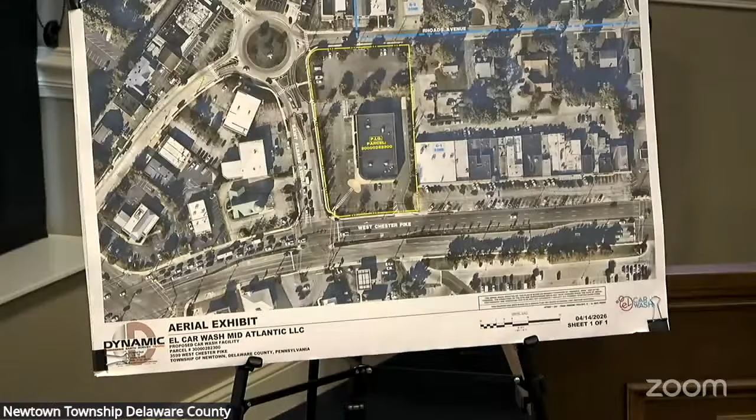Sure. The site is located at 3599 West Chester Pike, State Route 3 and St. Albans Avenue in the Township of Newtown, Delaware County, Pennsylvania. The site is zoned C1 Commercial District. It's approximately 2.21 acres and presently developed as a Rite Aid retail store. The site is bound by primarily C1 Commercial District to the northwest and all the south, west, and east. And a small portion of the site is bounded by the R2 residential district to the northeast.

Okay, and did you go over how the site is currently accessed? Sure. So currently the site is accessed... Is it helpful if I point? Do we have a pointer? Can I move up there, or point to the screen? So currently the site is accessed by West Chester Pike on the south, and that's a right-in. And then it's also accessed by St. Albans on the west. Thank you.

I'd now like to show you what I've marked as exhibits A4 and A5. For the record, A4 is entitled zoning plan. It is dated April 7, 2026, prepared by Dynamic Engineering. And exhibit A5 is entitled zoning landscape plan, also dated April 7, 2026, prepared by Dynamic Engineering. Did you prepare or supervise the preparation of both exhibits A4 and A5?

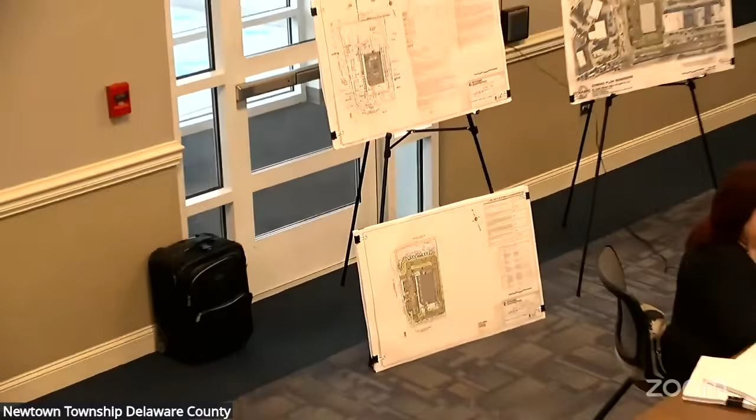Yes. Okay. And which one do we have up on the board here? That's A5, the landscape plan. And to the left would be the zoning plan, exhibit A4, correct? This is the landscape plan. That up there? Oh, sorry, all right. It's okay. And then the zoning permit plan is here. And this is a rendering of the zoning permit plan and landscape plan. Okay, and using a combination of those exhibits or the combined rendering, please describe for the board how the property is proposed to be redeveloped.

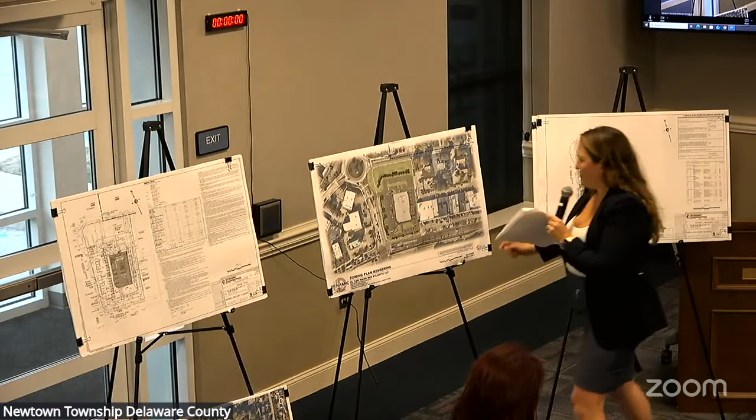Sure. So the project proposes adaptive reuse of the existing building that's there today. The existing building will be retrofitted with a proposed car wash tunnel and interior parking spaces for vacuums. The existing driveway along West Chester Pike is proposed to be closed. And a dedicated entrance is proposed to the north, as well as a dedicated egress to the south. So overall, the site is proposed to have clockwise circulation.

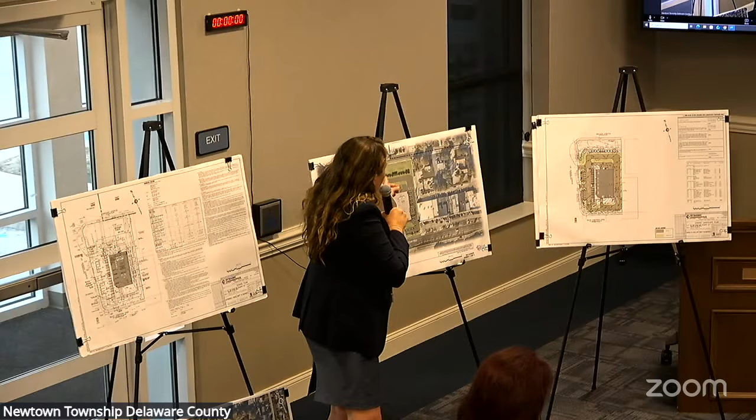So cars enter from the north along St. Albans and then turn into the site to queue, going through the drive-through, stacking, and then through the car wash in the building. Cars then have the option to either make a right turn into the vacuum spaces or make a left and go out to the exterior vacuum spaces, and then ultimately exit the site from the egress point along St. Albans. Okay, is there a bypass lane in case you don't want to go through? There's a continuous bypass through the entire drive-through. Okay, but the circulation pattern for the car wash is one way?

Correct. Okay, and what's happening to the rear of the property compared to the existing conditions? So in existing conditions, the rear of the property is primarily paved with a parking lot. As part of this proposed development, the parking lot will be demolished and new landscaping will be brought in. There's a significant improvement and reduction in impervious surface overall. There's proposed landscaping to the north to create a consistent buffer, as well as landscaping on the west side along St. Albans and along West Chester Pike.

Okay, and approximately what is the distance between the Rhoads Avenue curb line to the buffer or edge of the drive aisle? A little bit less than 80 feet, about 79 feet. And currently, where does the paving go to in the existing conditions? Do you have an estimate? Yep. Currently, the pavement goes to within about 5 feet of the property line. Okay.

Has the applicant developed any conceptual architectural elevations or designs as to how the proposed redeveloped car wash will look? Yes, I have. And if we can, turn to exhibits A6 and potentially A7 in the packets, and if you need some help changing the boards, I'll help you there. I have the elevations. Do you want more? Yeah, hold on.

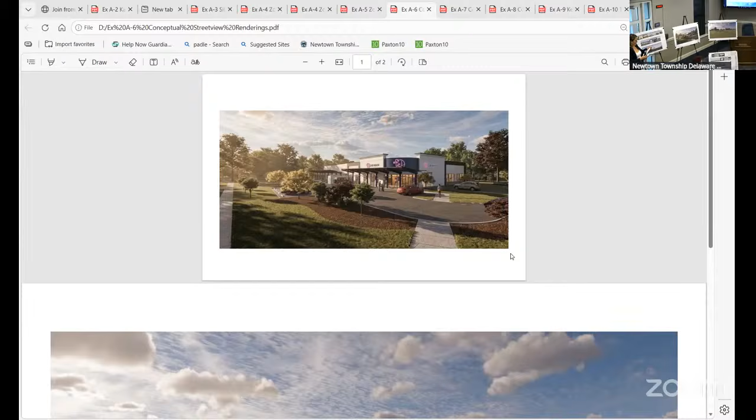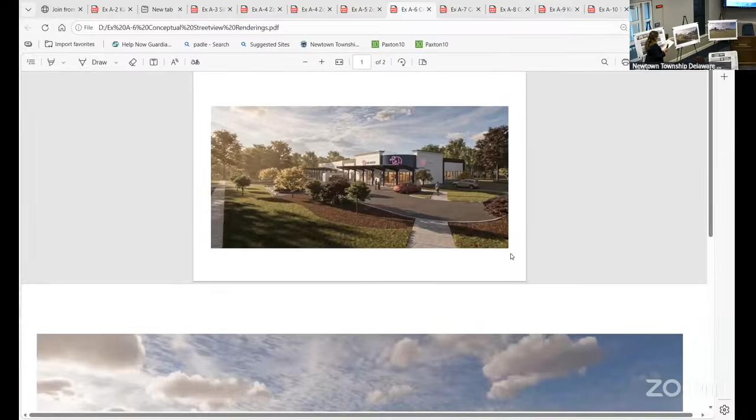Greg, I've been able to pull it up on the screen as well, and I'm sharing the document. So I'll try to stay with you as you walk through. So Kate, looking at what's on the boards going left to right, left is the conceptual renderings, that's exhibit A7. And then the streetscapes are the ones in the center and on the right, that's exhibit A6. The one on the left is A7. If you could please describe for the board where these are taken from, the vantage points, and what they show.

Sure. So I'm gonna start on the right. So this conceptual street view rendering is a view from the intersection of Rhoads Avenue and St. Albans Ave. We're looking towards the northwest corner of the building, and we're seeing sidewalk and green space at the rear of the property, as well as the screen plantings along the drive-through lane. One thing to note is that

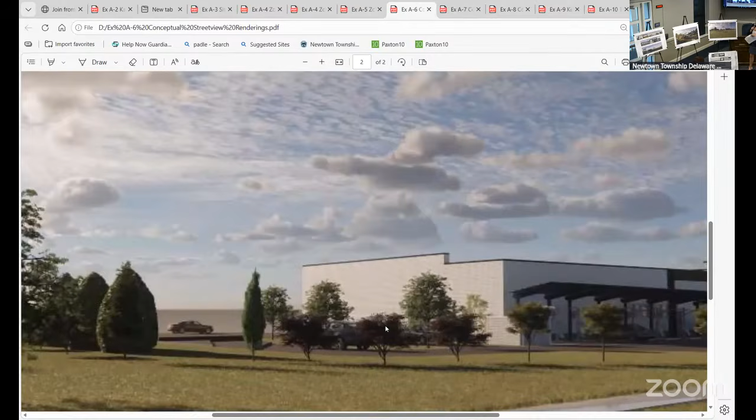from Rhoads Avenue, there's a fairly significant grade differential from Rhoads Avenue down to where the building is. And in addition to that grade differential, we've also bermed up the landscaping to provide a buffer. And then there's an additional approximately 3-foot drop from where that berm is down to the car level. So you can see from this view, you're seeing the upper portion of the building, but there's a good amount of screening for where the cars are relative to the stacking or queuing.

I know it's conceptual, but approximately how much additional berm height are we talking about? So the grade differential from Rhoads Avenue down to where the cars are is close to about 6, 7, maybe even more feet from where you are on Rhoads Avenue down to where the cars are on the stacking lane.

Okay, and then in terms of the landscaping, this is depicting landscaping at what stage? Is it when it's planted, when it's grown? Do you know? Somewhat mature, but not fully mature to its full potential. Okay. And of course, is that something that would be more fine-tuned during the land development process or permitting process? Yes, absolutely. Okay. And if you could take us to the next streetscape rendering, please, the one in the center.

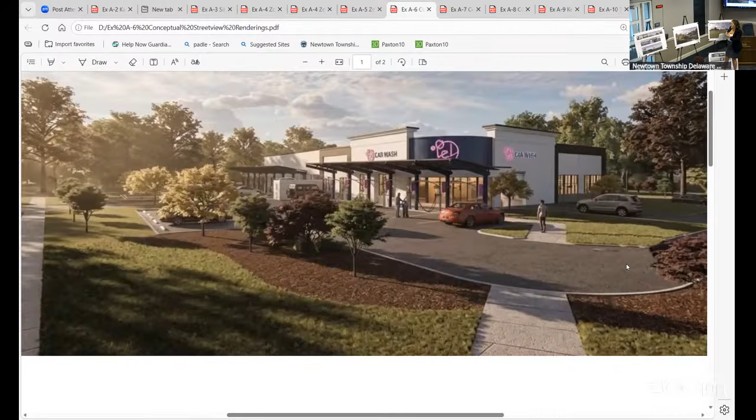Sure. So this conceptual street view rendering is a view from the intersection of West Chester Pike and St. Albans Avenue. It's looking at the southwest corner of the building and at the connection to the public right-of-way. It's a little bit hard to see through the landscaping, but there are proposed parking spaces and vacuum spaces that are kind of screened by this area, and you can see the tunnel entrance on the right, where cars would be coming around, stacking, and then coming through the tunnel.

Okay, and that drive aisle that's in the front right corner of that portion of Exhibit A6, is that part of the bypass? It's the bypass. So cars that are using the car wash operations wouldn't typically be using that. So it would leave that really open for pedestrian use.

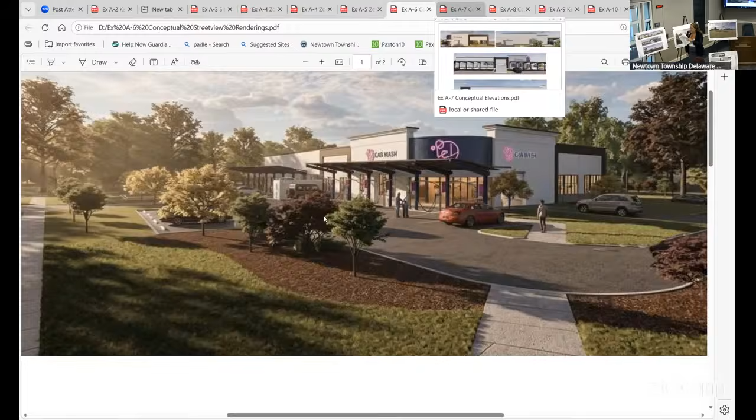Okay, and looking at the architecture, is it generally similar to the building facade of the existing Rite Aid? I mean, it's not changing its structure much. Right, so the actual structure height and massing is not proposed to change significantly. The existing Rite Aid canopy, which is in the rear of the site and closer to Rhoads Avenue, is proposed to be removed. And then the new canopy is proposed on the eastern side of the site.

And maybe it'd be helpful to start with A7 now, talking about those elevations on each side of the building. If you could highlight some of those items, and then also generally describe the building materials shown on these renderings. Sure. So the elevation views are from the southern, northern, western, and eastern facades of the building, from left to right.

So this is the south elevation, and it shows the existing entrance that's there today. The facade is being modified, but the overall building structure is intended to remain. And you can see the tunnel entrance, as well as windows that are being incorporated into the facade where the vacuum spaces are. All right, and that's the first picture in the upper left-hand corner of Exhibit A7 you were talking about. Correct. Okay, so let's go to the next picture.

You're going to the right. Yep, so this is the north elevation. So you can see here the tunnel exit and the access to the interior parking and vacuum aisle.

As you can see, there are roll-up doors for the vacuum spaces that can open and close. Same thing with the tunnel. Now, before you go on to the next one, this is the view from where? The drive aisle internal in the site? Correct, much closer, right where either the queuing is or right within that internal drive space.

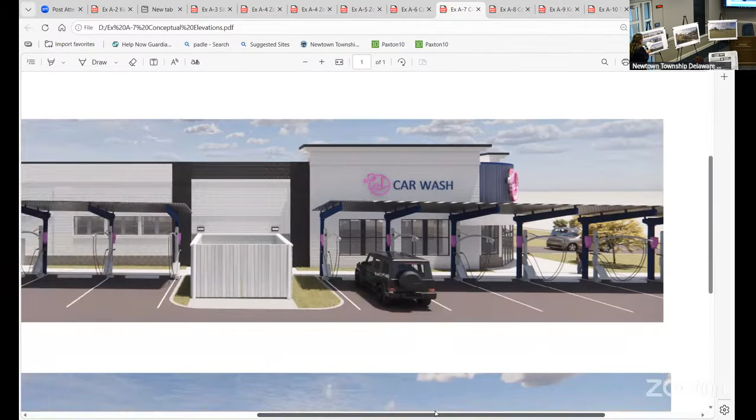So this is the west elevation. So you're actually standing in the parking area, and you're looking into the proposed vacuum spaces and towards the west facade. Okay, and again, that's not what you would see from St. Albans. No, even from the intersection, where there's a gap in the landscaping for the pedestrian access, you start to get screened there, but as you move west, you're gonna be on the other side of the landscaping.

Okay, and then let's go to the last picture that's on the bottom of A7. So here, you're at the east elevation. You can see the 3 drive-through lanes, the building and the drive-through canopy, which is adjacent to the building, and the pay stations. Okay, and do we have a list of general building materials that are proposed here at this point? Yes, so you have this exhibit as well, correct? And I believe that's A8. Correct.

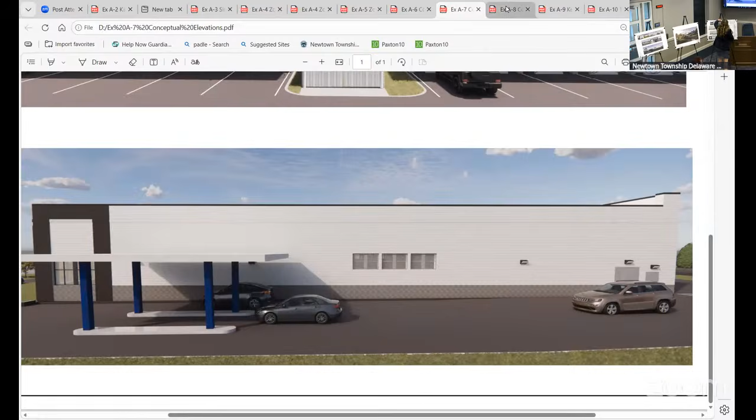So if you could highlight just what's proposed at this point in terms of conceptual building materials. Sure. So again, starting in the upper left, this tower area, the M6 and beyond, it's existing brick. M4, that's where we start incorporating corrugated metal panel, which you can see the vertical panels. As we move our way east along the elevation, M6 here again, this is existing brick material. M8, which is the darker band around this space, is wood paneling.

And then as you move internal to that, you've got M5, which again is an existing brick with a slightly different gray or finish. And then you can see the storefront windows, which have been incorporated. Let me see if there's anything at the entrance. I think it's also worth noting the existing score of the CMU, which is also going to be painted more of a medium gray. So I think this whole color palette and material pattern continues itself around the perimeter of the building and shows up in different elements around the building.

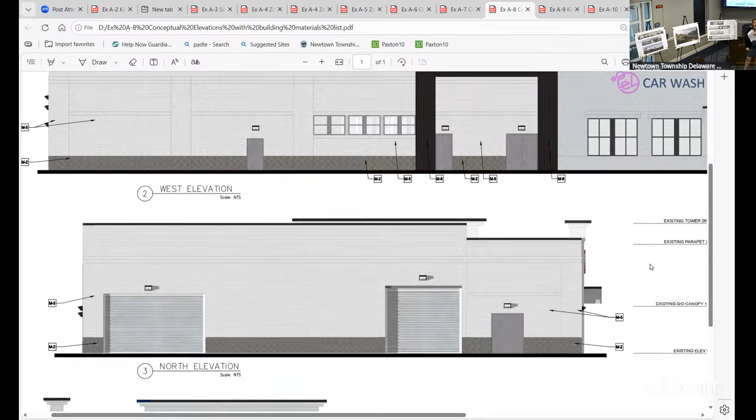And is it your understanding the applicant is still willing to work with the township on what this building will look like? Absolutely. And is it your understanding they've gone through multiple iterations already to come to this point? Correct. Both soliciting feedback and wanting to provide materials and color palette that are consistent with the overall township goals. So let's put back up the zoning plan or the overall rendering that you had. And then if you could join me back at the table as we go through some of the other aspects.

So as part of your testimony this evening, did you analyze the specific applicable area and bulk regulations under section 172-71 of the C-1 district? Yes. Okay, and basically testifying off of the site plan exhibit A3, let's go through each of those to demonstrate how the redevelopment complies. The first requirement under 172-71A is the front yard. Requirement is there should be a front yard on each street on which a lot abuts, which shall not be less than 20 feet in depth. Does the plan comply and how?

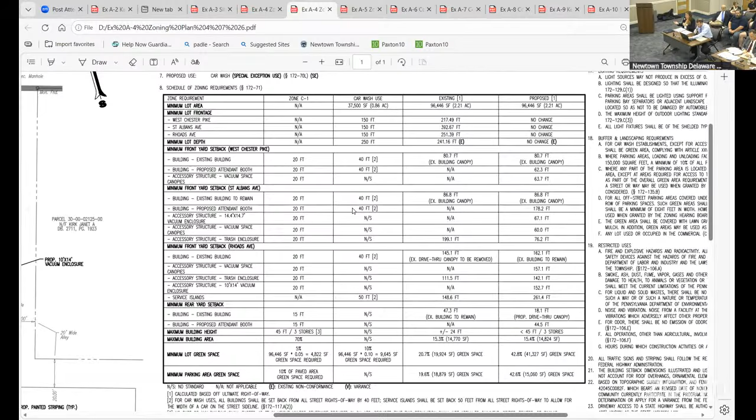Okay, next one is 172-71D, height regulations. States that no building shall exceed 3 stories excluding basement or 45 feet in height. Does the plan comply, and if so, how? Yes, the plan complies. The proposed building height will not exceed more than 3 stories. It's a 1-story building, or 45 feet in height. The existing building and architecturals for the proposed project will be maintained at 26 feet, 10 inches approximately.

Okay. Next item is 172-71E, dealing with loading and unloading space. Is that applicable here? And if not, how is this being dealt with? So loading on this site will occur in the drive aisle. It'll be during off hours and not in conflict with regular business operations. Okay.

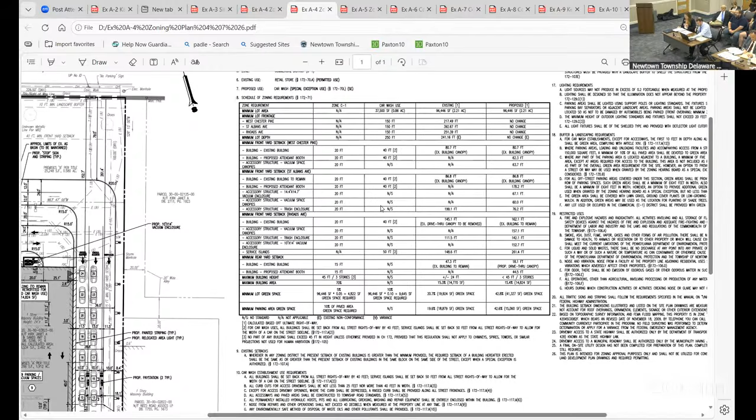172-71F is dealing with parking spaces. And I think there may be some specific car wash criteria here as well, but if you could please tell the board, how does the proposed redevelopment comply with the minimum required parking? Sure. So for car wash operations, the minimum of 25 parking spaces per washing unit are required, and that includes storage or stacking lanes. In addition, there's 1 parking space required for each employee on the largest work shift with no fewer than 2 parking spaces.

So for this particular site, this proposed car wash, there's 1 washing unit. So 25 spaces are required per washing unit, total of 25. In addition, there will be 4 employees per shift and 1 space per employee is required. So that's a total of 4 parking spaces required for employees, which is a total of 29 spaces required. And we're proposing 29 parking spaces as well as 43 stacking spaces. Okay.

The next requirement is 172-71G, which deals with minimum lot area. Does that apply here in this instance? Minimum lot area? Yeah, it says no building permit shall be issued in commercial districts with on-lot sewage disposal unless the minimum area of the lot for each family unit or for each store or for each combination of store and family unit in the building to be erected is 6,000 square feet. Are we on-lot sewage? No, the project is proposed to connect to the municipal sewer, so lot area is not applicable in this case.

Okay, and as I just mentioned before, there are some specific regulations for car washes under the ordinance. I believe it's section 172-117B. Did you review those as well? Yes. All right, so let's go through each one of those. The first one, and this is where you get into incorporating some other regulations as well, but it says that all provisions of subsection 172-117A, 2 through 6, and 9 through 12 apply here. Is that right? Correct. And that's for gasoline service stations.

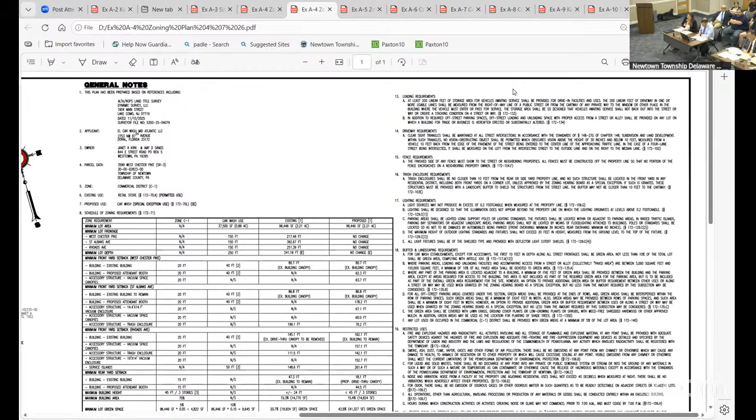A3 is all curb cuts for access driveways shall be not less than 25 feet nor more than 40 feet in width. What are the proposed curb cuts for the access driveways here? So the proposed driveways provide for a 20-foot wide ingress and 20-foot wide egress, both along St. Albans, which total 40 feet wide.

Number A4 says, except for access driveway openings where the curb shall be depressed, a raised curb shall be provided along all street frontages. Are we proposing raised curb? Yes, anywhere where we're proposing curb to tie in, we're proposing a full height curb. And then for the majority of the frontage, we're not proposing curb improvements at this time.

Okay. A5 requires all access ways and paved areas shall be constructed to township road standards. Is the applicant proposing to construct all the road access ways and paved areas to township road standards? Correct, the applicant will comply.

All right. A6 is, and I'm not sure if this applies, it says all permanently installed hydraulic hoists, pits, and all lubricating, greasing, washing, and repair equipment shall be entirely enclosed within the building. I guess the washing equipment may apply. Yes, all washing operations, equipment, drying, everything occurs inside the building.

Going to A9, noise from repairs and other operations shall not exceed 40 decibels when measured at the property line at any time, and that's what the applicant has challenged. Is that correct? Yes. And will the applicant have a separate noise sound expert testify with respect to the decibels? Yes.

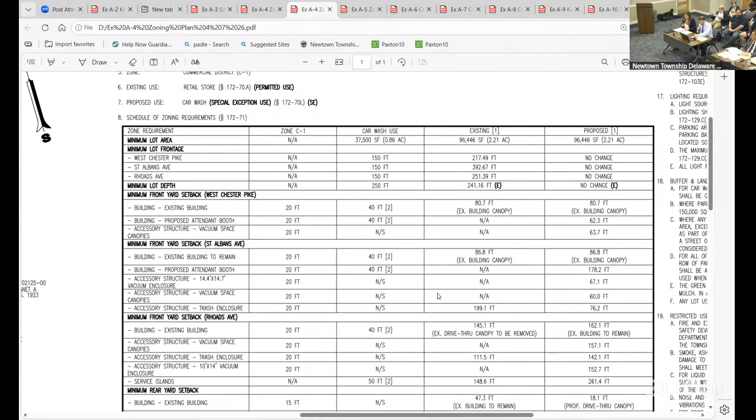Okay. So while it's not the applicant's initial burden under the law to discuss and prove the general special exception standards, did you also review those general standards under 172.13? Yes. All right, so let's go through each of them.

172.13A1 states that this application falls within the provision of this chapter, which accords the applicant a right to seek a special exception. And is this use permitted as a special exception under the zoning ordinance? Yes. Okay. Number 2 is that the use is not prejudicial to the character of the immediate vicinity and will not have a detrimental effect on neighboring properties.

First of all, again, is this a permitted use? Yes. Okay, and with respect to being consistent with the character of the immediate vicinity, do you have an opinion that you would like to offer? Yes. The proposed car wash is consistent with the overall character of the commercial corridor.

Right, number 3, that the use is suitable for the property in question and is designed, constructed, operated, and maintained to be in harmony with and appropriate in appearance with the existing or intended character of the immediate vicinity. Again, this is a permitted use under the ordinance. Correct. All right, and do you have an opinion as to whether the use is suitable for the property in question? Yes, it is. And why is it suitable for the property in question?

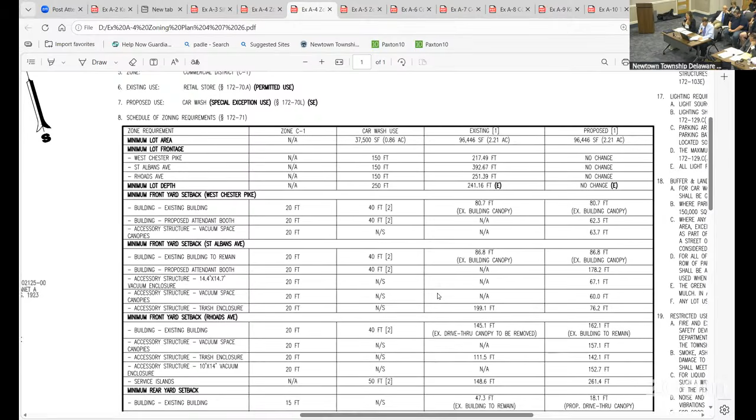So the property is zoned commercial, where banks, restaurants, and retail service shops are permitted uses. The adjacent uses to the north, along Rhoads Avenue, there's office and commercial uses. To the east, there's a retail strip and office use. To the south, you have West Chester Pike, Route 3, and a Mobil fuel station, and shopping center beyond. To the west, along St. Albans Avenue, you have WSFS Bank and other commercial uses.

Okay. Number 4 is that water, sewage, stormwater drainage, fire, and police protection can be provided for the use. And this is a redevelopment of a site. Have those services been offered previously for the Rite Aid? Yes. With respect to the water and sewer usage, what was your testimony earlier? That we propose to tie into the public utility services.

Okay. Number 5, I think is similar to an early one, but it's that the use is physically suitable for the site and there are no topographical, soil, geologic, drainage, or environmental features which would cause the proposed development to adversely affect the health, safety, and welfare of the neighboring property or the township. Do you have an opinion as to whether the property complies and the use complies?

Yes, it's physically suitable. It was previously developed as a Rite Aid with the drive-through, and in fact here, we're improving the conditions by reducing impervious on site and adding significant landscaping to the overall site. And generally, with respect to stormwater drainage, how does the applicant intend to manage the stormwater runoff on the site? There's existing stormwater management infrastructure on site, existing basins, existing drainage conveyance. Obviously, we will comply with the township stormwater management regulations. And the property is reducing its total impervious coverage?

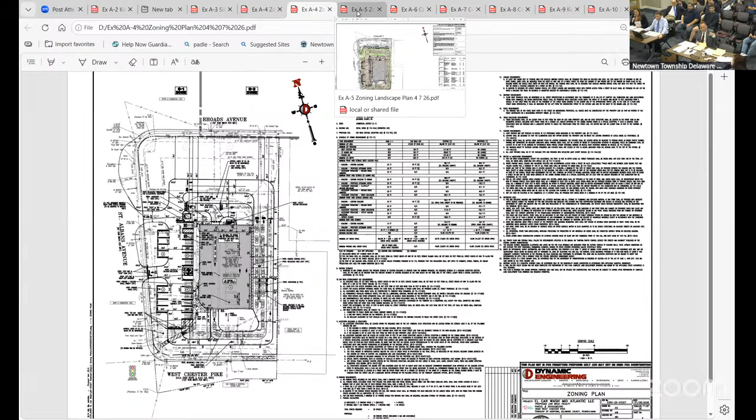Correct. And then I guess there's two options at that point, which is the car can make a right and go back into the building for interior service, or it can make a left and go kind of a U-turn down to the left side of the property to parking areas or vacuums, correct? Correct.

When the car is finished with that interior service, they come back out that northern side facing Rhoads Avenue, and then they would make a left towards the east side of the property, similar to the same traffic as they would make if they came right out of the wash tunnel and made that left, correct? Correct. And then those cars that are making the left are actually facing the entrance, correct? When they make a left out of the building? It's offset from it. But yes, facing that direction. Yes. So, if I may, just to be clear,

Rich, will you take the mic with you, please?

So this is the drive aisle, and you're saying it's offset because it's just slightly to the north here, correct? Just slightly to the north, correct? Okay, and so there is a conflict here, is there not, for cars making a left here and cars making a left coming in? No, there wouldn't be a conflict. The traffic that's coming from either the tunnel exit or the vacuum spaces is a controlled stop. And vehicles coming in from St. Albans have the right of way.

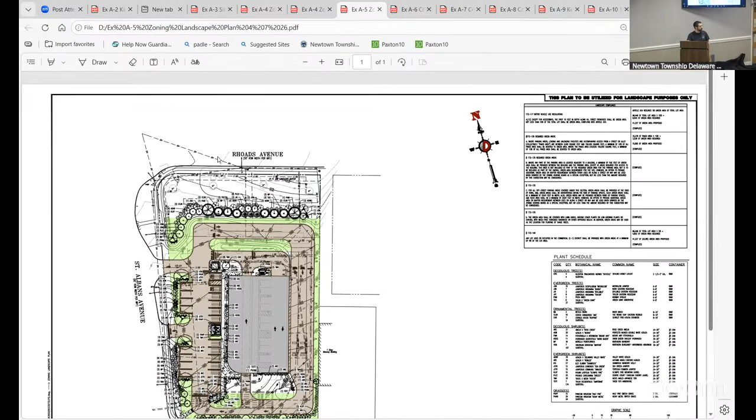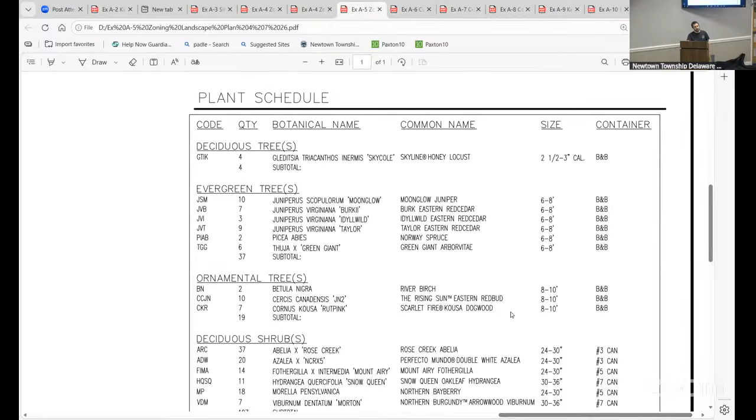So for deciduous trees, there's a total of 4 proposed, and they're skyline honey locust. As far as evergreens go, there's a total of 37 of those: Moonglow juniper, Burk eastern red cedar, Idyllwild eastern red cedar, Taylor eastern red cedar, Norway spruce, green giant arborvitae. And then there are 19 ornamental trees proposed: river birch, the rising sun eastern redbud, Scarlet Fire Kousa dogwood. Again, that was a total of 19. And then those are the trees.

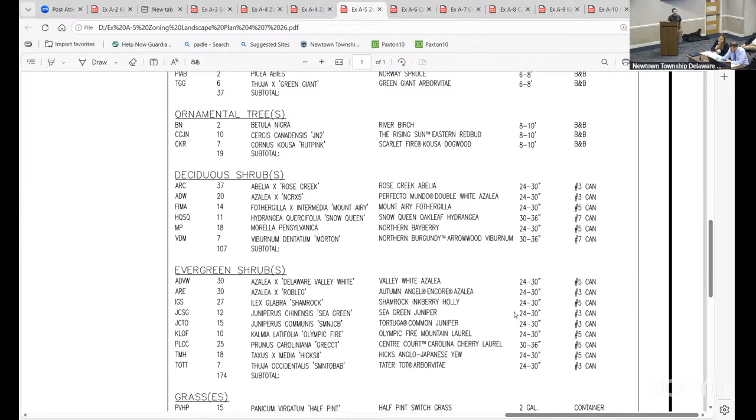Do you want to get into the shrubs or grass? No, that's fine. Do we know how many of those trees are deer resistant? I don't know here, but I know the applicant would be absolutely amenable to accommodating deer-resistant species as part of the overall land development process. Concern is that these are all planted and then deer would come by and make sure they're not planted anymore. Understood. Yes.

Do you know the number of blower units for the dryer? Blower units? Yeah, and that would be something another witness can testify to. But in terms of construction, you could not tell me how many there are. She is not the witness. Another witness would answer that question. I'm a civil engineer. Gotcha. Not in the plans at all, okay. And will there be any exhaust system for the tunnel? Again, that's architectural. It's beyond her testimony. When will that witness be testifying? We can have a witness testify to that as to the building construction.

That'd be great. My other question is, in terms of the entrance and exit, which direction can the cars turn once they exit the property? So it's a full movement, so they could go left or they could go right. They can go left once they exit the property, back on the West Chester Pike? They can. The exit is intentionally located, and our traffic engineer can also testify to this, to be aligned with the full movement driveway on the opposite side of the street, and to be at a location that's beyond the queuing, the left turn lane restriction. Have you ever tried to make a left from that property? That's not for her testimony. I'm just asking a question there.

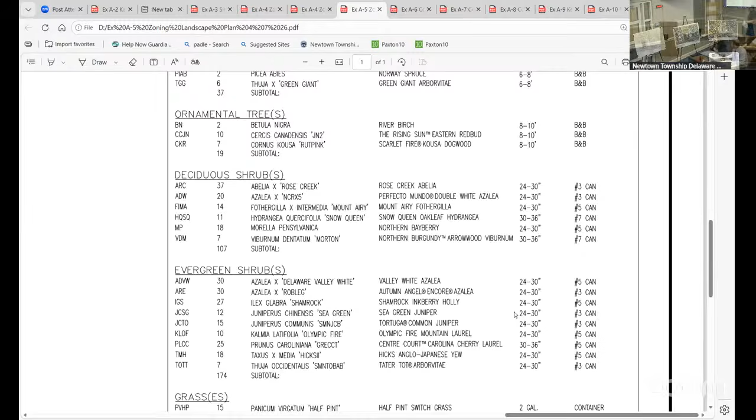Sorry. Does the design contemplate a detailing area on the space? A detailing area? Like car detailing? So it's strictly car wash, there won't be any side detailing of those vehicles? Correct, no. Car wash, vacuum usage, for individuals to do their own cleaning out of their car, but no detailing operation. Is there any distinction between the vacuums on the interior versus the vacuums exterior? No, just that in an area where you have colder weather, giving that optionality for customers to clean their car inside, whether it be a rainy day or cold weather, is an amenity that can be offered here because of the reuse of the building.

And are there parking spaces? Did I hear you say parking spaces on the interior as well? Correct. So the parking spaces are where the vacuums are placed. So someone pulls into the parking space to be able to vacuum out. So you're counting a parking space as a vacuum space? Correct. And will there be office space as well? Yes, there's a small office space to account for the employee operations. And the payment system, is that going to be on the exterior by digital equipment, or will it be someone manning the payment? We have another witness who can speak to that. Okay. Go ahead.

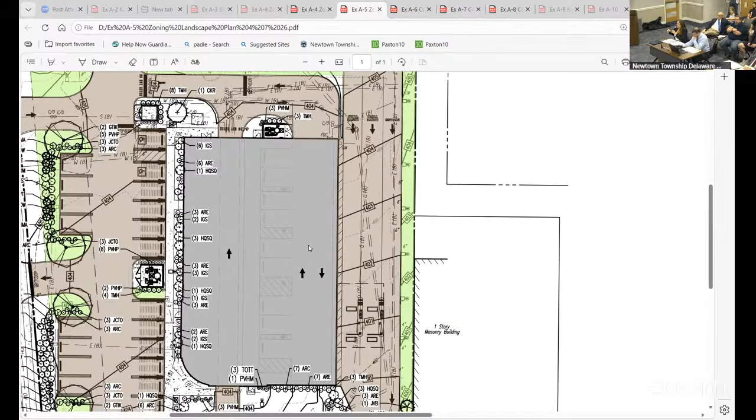So as part of your stormwater management, are you going to have a retention area at all? So there are 2 existing basins that are on site now. There's a rain garden within the landscaped area that's between the internal access drive, where you come out of the car wash tunnel, and where you can access the interior vac spaces between that access drive and the queuing. There's an existing basin there today, and then there's also an existing below-grade basin in the southern portion of the site that's proposed to remain.

That will compensate for any excess water, or stormwater, as a result of any operations? Yes, overall, the site is going to have a drastic reduction in runoff because of the change in cover. And for the car wash operations, the cars are washed and dried within the building. Is there any impact to the sanitary sewer system?

No, we will be using public sewer to be able to discharge restrooms in the office space. And then ultimately, there will be an oil water separator as part of the overall plumbing system to be able to make sure that that doesn't go into the public sewer.

Okay, thanks. Do you know how many EDUs have already been dedicated to that property? Yeah, I don't know off the top of my head. I'm trying to remember since I did the approvals. I think it was 3, but I'd have to go back and check again. Okay. All right, that's all I have.

Mr. Olympia, you had a question? If you could just go back up to the podium. We just need you for the microphone. There's been a significant increase in costs to the residents in the municipality for sewer. I just want to make sure that this doesn't get added on to the sewer costs. The residents shouldn't be eating the cost of a business putting in a business that uses significant water.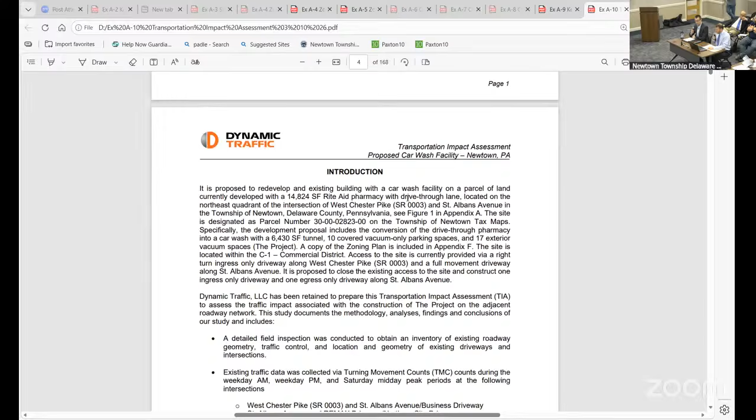And what did you determine with respect to the future capacity of the intersections that you studied, taking into account the additional traffic that ITE would say would be generated by the car wash? As I mentioned, there were minimal changes to the existing levels of service and delays with the addition of the site-generated trips from the car wash. And could you be a little more definitive as to what you mean by minimal changes? Changes in overall level of service of approximately 2 seconds or less, which, as I mentioned, remain within PennDOT's allowable degradation for new developments, which is typically 10 seconds, where they require a development to mitigate level of service impacts. And was that for all peak hours? Yes, that's for all peak hours.

With respect to the access in and out of the site, did you conduct a sight distance analysis? Yes. And what did you determine with respect to the safety and efficiency of the ingress and egress to the property? So we found that adequate stopping sight distance was provided for those 2 access points. The Newtown Township SALDO does require a minimum of 300 feet, which is the desired sight distance from the egress driveway. We found that not to be met looking south towards the signal, just because of the distance from that driveway to the signal. But again, that is run typically using a 25-mile-per-hour speed, whereas any vehicle traveling onto St. Albans Avenue would be needing to make a left or right turn onto St. Albans Avenue and likely traveling at a lower speed. Additionally, it still did meet the minimum stopping sight distance of about 150 feet, which is typically what PennDOT requires in order for that access to be allowed.

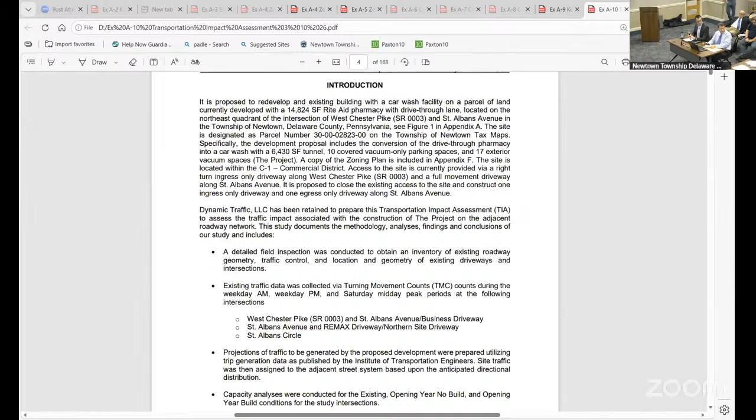Mr. Savage, so I believe in your report, you explained that the land uses along St. Albans Avenue and Rhoads Avenue in the vicinity of the project area are a mix of commercial and residential, correct? That is correct. And currently, with the old Rite Aid building there, there's a right turn only entrance from West Chester Pike into the site, correct? That is correct. And that is eliminated with the proposed redevelopment, correct? Correct. That entrance is proposed to be closed.

And when you were looking at that chart comparing the trip generation of the car wash compared to the Rite Aid, I think you said it was not a significant increase, but I think it's page 11 of your report. Correct. Table 5. Yep. So when we're looking at just total trips, the net change for Saturday peak hour was 74, right? Correct. So that's 74 more trips, meaning in and out being two trips, 37 more vehicles. 37 more vehicles from what? How many vehicles before was projected? So the projection for the existing pharmacy is 132 trips, or about 66 vehicles. So it would be an increase of 74 trips, or about 37 vehicles on top of that existing pharmacy. So a 50% increase?

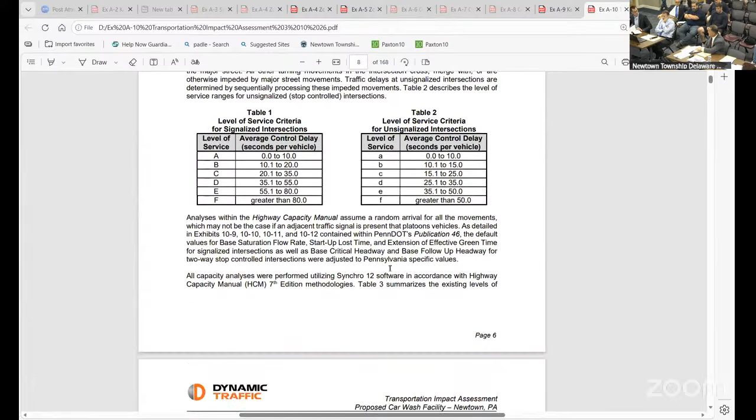So you're saying that the chart on 11, when you say an existing pharmacy would generate trips of 30 in and 27 out at the AM peak street hour compared to a proposed car wash, that's not actually comparing what you've calculated as likely trips for a pharmacy of 14,800 square feet? You're saying that's actually just the general traffic on the street for an empty pharmacy? No, table 5 strictly looks at how many trips that site would generate if it were reoccupied with another pharmacy with a drive-through. So we're strictly comparing potential reoccupancy of that existing building with this car wash. And that's what I was asking. I thought you said you were comparing it to an empty site.

Separately, when we took those existing traffic counts, we added the adjacent developments on top to develop the no-build traffic volumes. That assumed nothing was on the property. I understand. And that's the subsequent analysis; I'm talking about the trip generation. Okay. So what I'm saying is, number one, we haven't looked at other car washes to say this is how many trips are actually happening at those locations, correct? Correct. And we can't count how many were going to the Rite Aid, because that's closed now, right? Correct. So this is just based off of a book, right? It is, but as I mentioned, that data is collected at various sites throughout the country.

Now, do these trip generations, whether it's build or no build, or this chart, account for surge traffic? There's daily traffic, like on a given Tuesday in June, there's so much traffic for car washes versus a pharmacy. But what about times coming out of a snowstorm, when everybody's got salt all over their car and everybody wants to get there? Is that in this report? It is not, no.

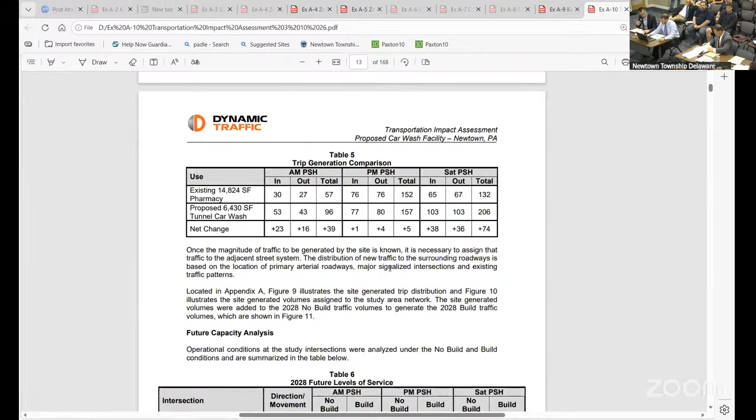I think in your report around page 8, and maybe also in your appendices, when you analyze northbound St. Albans Avenue, you characterize it as 2 lanes, a left turn and through lane and a right turn and through lane, correct? Is this referring to St. Albans Avenue and Remax driveway / Northern Site driveway on page 8? Yeah. I believe the existing lane configuration right around that existing driveway goes from 2 lanes to 1. It goes from 2 to 1, so you're aware of that. Correct. It's 2 lanes at the intersection of West Chester Pike, and it drops to 1 lane as you get to the entrance to St. Albans Circle. Okay. Do you discuss that in your report anywhere?

In the summary, again on page 8 for St. Albans Circle, about the 5th line down, it says the northbound approach of St. Albans Avenue provides a shared lane. Well, it says the northbound approach to St. Albans provides a shared left turn through lane and a shared through / right turn lane. So you're saying that's all 1 lane now? Further down the page, under the St. Albans Circle heading, on the 5th line, it says the northbound approach of St. Albans Avenue provides a shared U-turn, left turn, through, right turn lane. That's meant to signify there's 1 lane entering the roundabout from which you can make any movement. So you've factored that into your analysis. Okay.

I believe you said in your report that you performed turning movement counts, that you went to the site or had somebody go and physically count. And that was done on 1 day, correct? It was done February 4th, 2026, a Wednesday, from 7 to 9 a.m. and 4 to 6:30 p.m., and on Saturday, February 7th, from 11 a.m. to 2 p.m. I meant 1 weekday, 1 weekend day. Correct. Is there a reason you picked Wednesday, February 4th and Saturday, February 7th, as opposed to any other day?

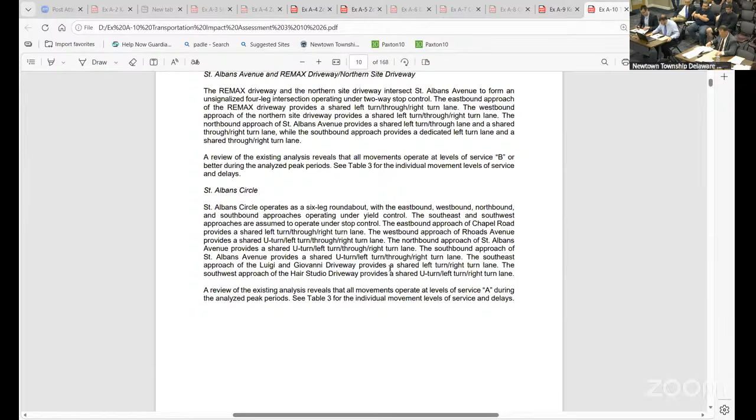If you could go to your appendix, I think it's Appendix A. I know everybody doesn't have an Appendix A, but do we have an Appendix A for the board? You up here, okay. Gotcha. I understand. Thank you.

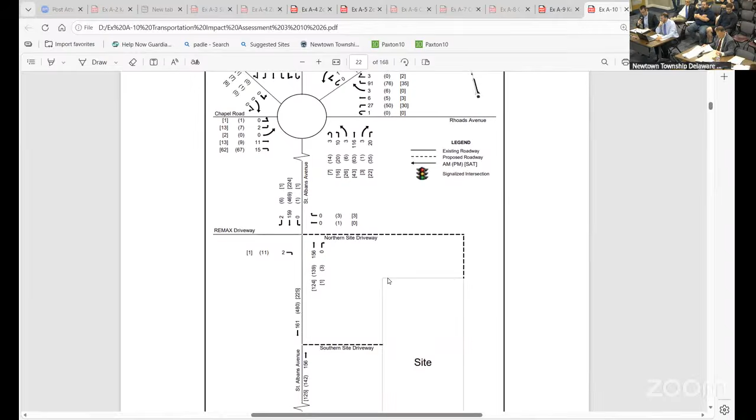So it starts off, okay, that's the site and the site location. We'll go to the next page. We have figure 2, 3. I can walk through the various figures. Yeah, if you could just generally walk through figure 2 through 9, just briefly, and tell us what these show. Sure. So figure 1, as you mentioned, was just the site location map. Figure 2 is a summary of the existing traffic volumes that were conducted on those 2 dates in February.

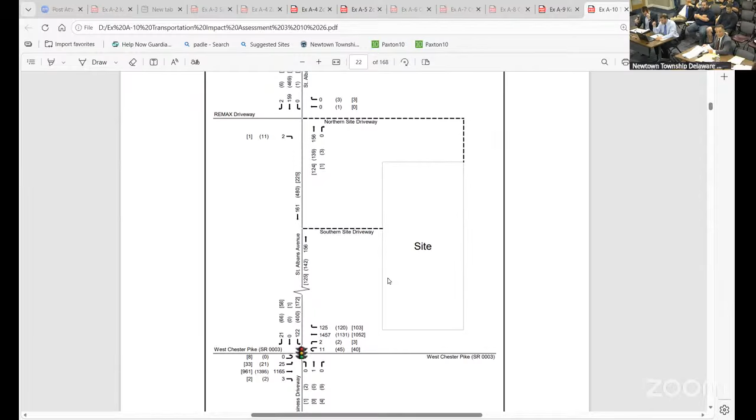And just as an example, you're on figure 2, you said? Correct. So from the circle, heading south towards West Chester Pike, there's a number 159 with an arrow pointing south. Does that mean 159 cars during the peak hour heading south? Correct. So there's 3 numbers listed in each line. The first number is the number of vehicles during the weekday morning peak hour. The second number in parentheses is the number of vehicles that we counted during the weekday evening peak hour. And the third number, which is in brackets, represents the Saturday midday peak hour.

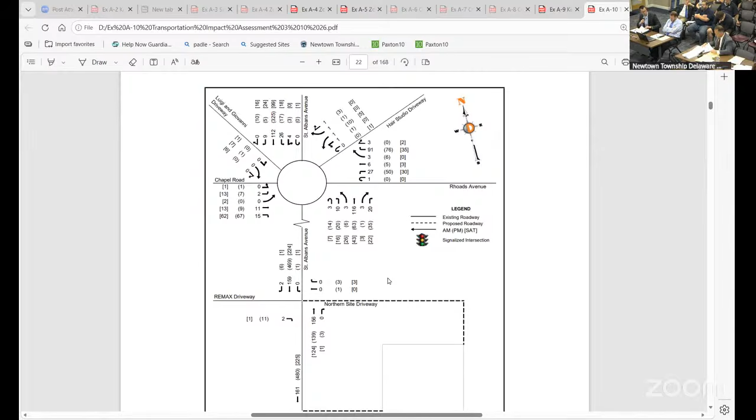Okay. And then, of course, there's a 0 there with a left turn. That's nobody was going into the Rite Aid, correct? Correct. Because that's empty. There's nobody there now, right? Correct. We did count a few trips during the weekday evening and Saturday midday peak hours, as you see there. We reported those, but those were removed once the site generated trips were added. Now, looking at similar numbers, by the time we get to figure 9, we go down to figure 9.

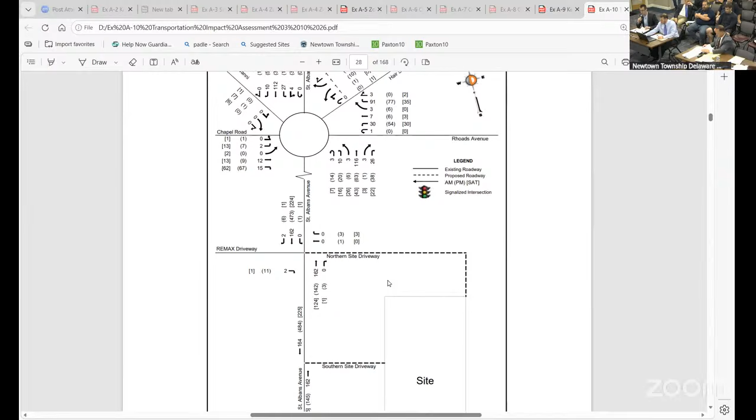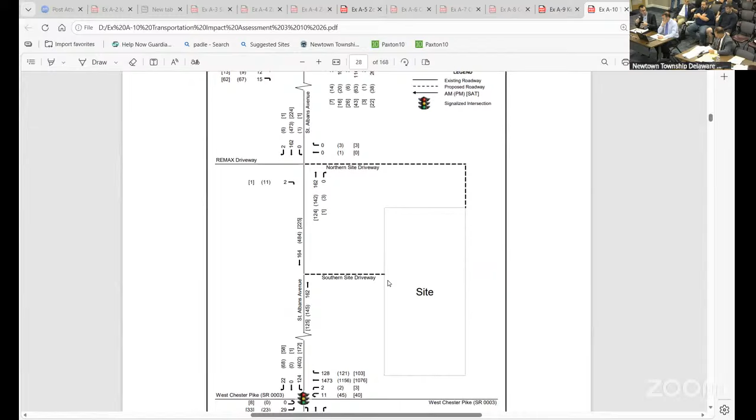Yeah, so, sorry to interrupt. Figures 3 through 7 represent the traffic volumes from those approved adjacent developments. Figure 8 represents the no-build traffic volumes, which is the existing traffic volumes plus all of those adjacent developments approved or under consideration. Figure 9 is a projection of where the site generated trips are traveling to and from. And this is what I want to focus on. So the no build represents conditions without the project. Then we essentially project and surcharge the site generated trips on top of the no build traffic volumes to get the build traffic volumes.

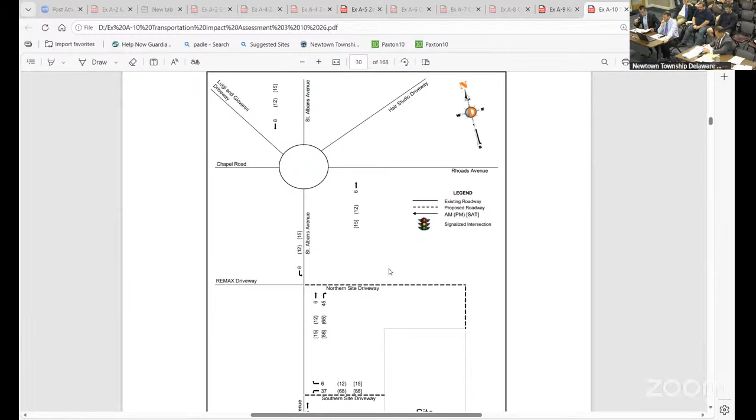Understood. So figure 8 is the no build traffic volumes. Figure 9 is the distribution of site generated trips, so what percentage is going where. Figure 10 is the actual number of site generated trips. This is taking table 4, which Mr. Adamman walked me through previously, showing the number of site generated trips per peak hour. It's an estimate of those trips traveling to and from the car wash. And then figure 11 represents the build traffic volumes. So this is essentially figure 8 plus figure 10. Okay. So no build volumes plus the site generated traffic.

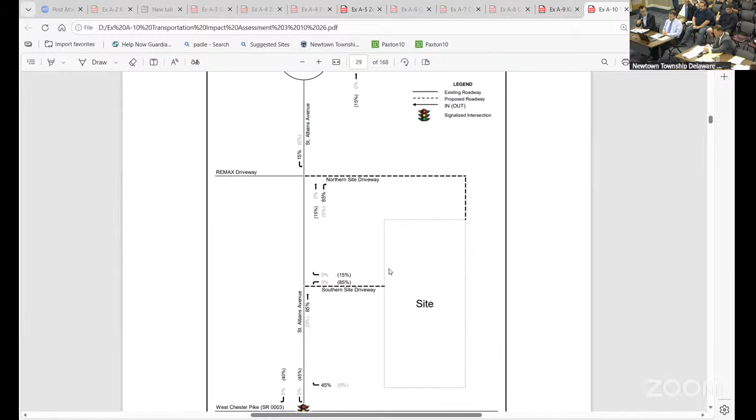I understand. So let's go to figure 9. It says there's a 15% number on St. Albans Avenue, correct? Correct. And what's that 15% represent? So that represents our projection of the percentage of trips that would travel to and from the site along St. Albans Avenue to the north, based on the existing volumes along St. Albans Avenue. And how many then would you anticipate come from the site heading from West Chester Pike? 85%.

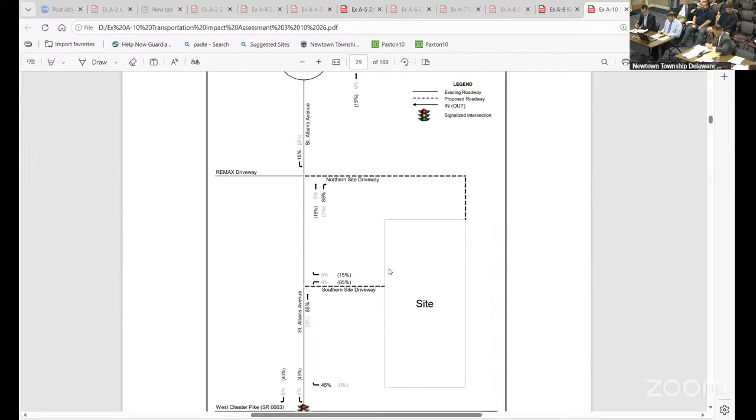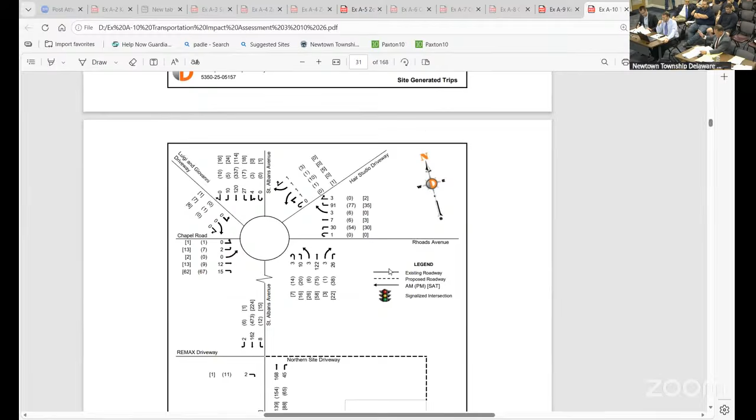And my question is, when I look at the traffic, figure 8 is the no build and figure 11 is the build? So it looks to me like on figure 11, this is with a car wash constructed and all the other developments constructed, we have 162 vehicles coming south from the circle in that peak morning hour, correct? Correct. And then how many do you have coming north on that same street, peak morning hour? At that northern site driveway, 168.

Okay, so you got 168 coming north and 162 coming south. How is it that you figure only 15%? That seems pretty much the same to me. How do you calculate that only 15% of the traffic going into the site will be coming from the north? So we were additionally looking at the traffic volumes along West Chester Pike. During that same peak hour going eastbound on West Chester Pike, there's 1,186 vehicles, and going westbound, there's 1,473. So we were essentially looking at the distribution of traffic in the entire network that was studied.

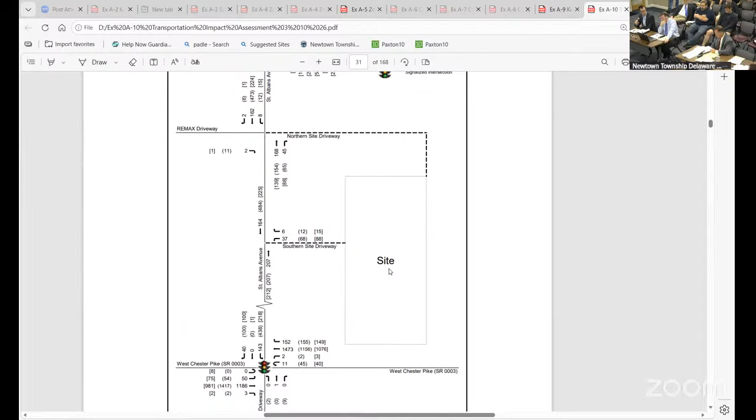But don't you make the determination for the build of 164 heading north from West Chester Pike at the peak AM hour? In my opinion, you'd have to consider the volumes along West Chester Pike, given the nature of the use. So when you have on figure 11 northbound 164 traveling north on St. Albans Avenue after the construction of the car wash, that doesn't include additional traffic that you're saying will be coming from West Chester Pike.

Sorry, the 164, where is that? Got it. So that's going southbound at the southern site driveway? That's still southbound. So I guess the trips. Oh, I see. Yeah. It's 168 northbound, correct? Correct. Okay, so, to be clear, I said 164 northbound, it's 168 southbound, but it's the same question, 162 southbound, 168 northbound.

And you're saying that 168 does not include additional traffic that you anticipate will be flowing from West Chester Pike because of that 1,100 cars per peak hour? So if you look at that same intersection at the northern site driveway. Yes. Next to the 168 is a 45. Yes. That is the projection for the site generated trips turning into that driveway. Okay. So that is essentially the surcharge of those trips. It would travel north from West Chester Pike and then turn right into the site at that northern site driveway.

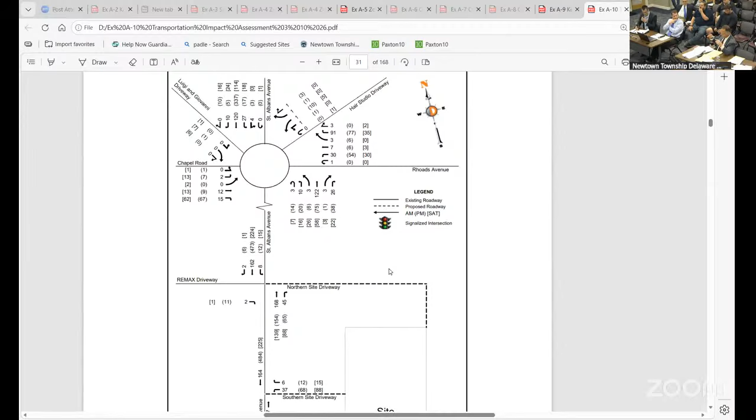Now, you've been on site, you've seen the actual traffic circle. Correct. And you're aware that as you come around the traffic circle counterclockwise and you head south on St. Albans, the turning lane to get into the proposed car wash site, you're familiar with that turning lane? Correct, yes. And how many cars would you suppose that would hold in queue? I don't have an exact length on that, but I don't think more than 1 or 2. 1 or 2, I think most people would agree.

And so if there's more than 1 or 2 cars queuing, that could actually impede the traffic flow of the circle, correct? That's correct. And in fact, if the traffic flow is impeded, somebody coming around the circle, it increases the likelihood of a collision, correct? Theoretically, yes.

You mentioned on page 10 of your report that the proposed tunnel is, I think you said it's greater in distance or shorter in distance than the tunnel length in the manual. Take a look here. Yeah, so I think our exact wording was the proposed tunnel space associated with the car wash is smaller than the 6,430 square feet utilized for this calculation, and therefore the trip generation calculations are conservative.

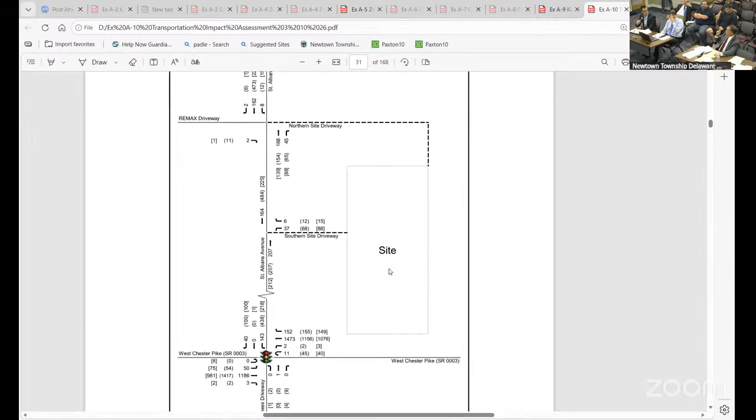Correct. I think in that case, though, they would ultimately wait for the queue to clear if somebody was trying to make a right from St. Albans Avenue. Well, yeah, you would hope, right? But you see the signs, don't block the box, but drivers don't always do that, right? Correct, and the left turn queue, as I mentioned, did back up to the circle. The right turn queue was substantially less, only about 130 feet during that peak hour, which I think is just south of that driveway location. But you got to get across the left-bound queues to get to the right-bound queues, right? Yes. Okay. So a responsible driver would hopefully wait. They might not wait. The other thing they could do is go back around the circle, correct? Correct.

And have you analyzed the estimated amount of increased traffic for cars that might actually go around that circle because they can't make that left? We have not. Okay. Did you take a look at any traffic that might go into other neighborhoods behind St. Albans Circle or behind Rhoads Avenue? No. Like shortcut traffic or anything like that? No.

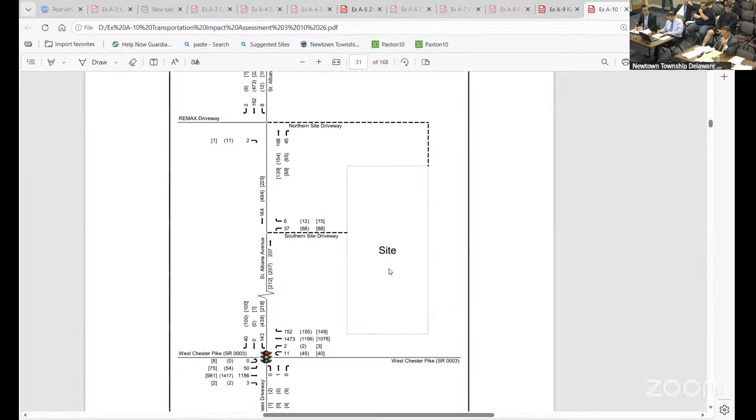And I don't think I have any further questions. Sorry it took so long.

So going back to talking about exiting the car wash right there, and knowing that if traffic is backed up for the two left turns and the right out on the West Chester Pike, we know that people are going to pull out because they want to make their way into that gap. And then the concern over cars coming down West Chester Pike, making it right onto St. Albans. So there's a lot of serious concerns with the way, as of now, you can't even make a left out of this parking lot, correct?

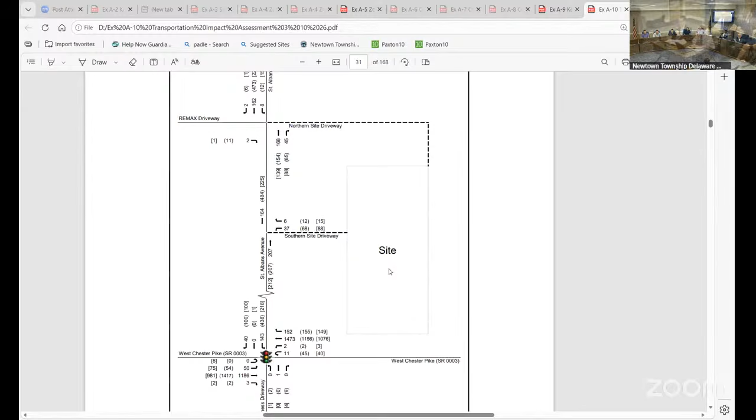Correct. And we've all seen that backup of traffic that's there. So now we're going to add additional vehicles, move the exit closer to West Chester Pike, and allow them to make a left out of it? Correct. So the access right now is very close to St. Albans Circle. I obviously wasn't part of the initial approvals for the Rite Aid, but I suspect, based on the proximity to the circle, that's why that left turn is restricted.

We are proposing to move that driveway south to provide adequate stopping sight distance to both the circle and the signal at West Chester Pike. But we also saw it as an opportunity to essentially avoid the need for every trip that's exiting the car wash to travel through the circle. So you're only saying 15% of people exiting the car wash are going to go back through the circle, correct? Correct. But if that driveway was limited to right out only, you'd have 100% of trips traveling through there, potentially coming back down on St. Albans Avenue to then make the left or right onto West Chester Pike, or traveling through other roadways to do that.

So the full movement egress does allow that opportunity to avoid the need for every trip to travel through the circle. And the queuing concerns that we had and observed were really only during that weekday evening peak hour. So during the other study peak hours, we didn't observe any sort of queuing issue blocking the driveway. Which, I mean, they're already in the township's most frustrating hours as it is, and now we're looking to add to that. So I'm sure a lot of the residents that are here, that's a concern of theirs, but it just seems, I don't know.

Understood. If the township, during the land development process, wanted to consider a peak hour restriction on that driveway during times of higher queuing, that could be a consideration as well. Do you have any numbers? I mean, obviously, this isn't the first car wash that they've done. Like, what are they seeing in terms of just average vehicles at the other car washes? I don't have that data in front of me, but I think that's something we could obviously provide.

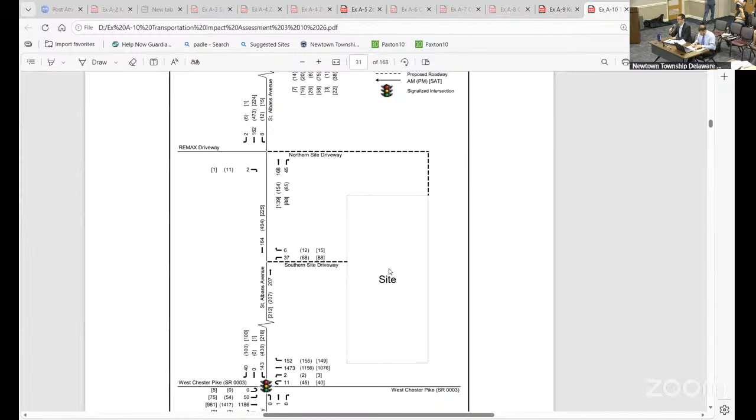Did you know that car wash was there? We had not specifically studied that car wash, no. Did you know it was there? I have driven past it before. Did you know there's another one down the other way past Cardinal O'Hara to check out? I did not know. Okay. That's all I have. And just to correct one thing, I do recall there was one other plan that we reviewed that had the access a little bit further south. I think we had lined that up with the driveway across the street at the back of the existing turn lanes in order to provide additional flexibility for that left turn out. What impact would that plan have had? I think that would make the left turn out even more difficult because it's closer to the signal.

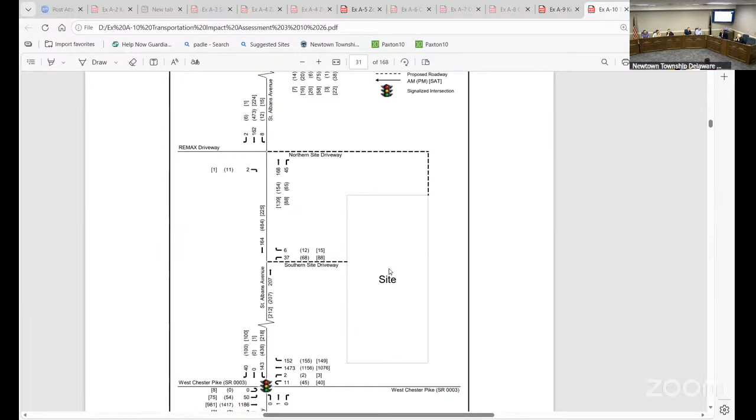Can I ask a question? Sure, go for it. I'm a numbers guy, and so I just want to understand the figure that's on the screen here, I believe it's figure 11. So if I'm coming southbound and I'm going to go to the light, you're saying there's 162 cars that are going straight, correct? I'm coming out of the circle, going southbound at the peak. There's 162 cars. Correct. 2 cars are coming out from the Remax driveway, so I get to 164. Correct. When I get down to the intersection of the south site driveway, I pick up an additional 37. Correct. If I did my math right, that's 201 cars.

Yes. How, when I get to West Chester Pike, do we only have 143 cars? So there's actually an additional 40 vehicles there, so it'd be 183. I'm sorry, I meant 183. Yeah, so the reality is the counts were taken at the same time at these various intersections. There is a little bit of imbalancing, just based on cars turning in and out of driveways; we didn't count every single driveway along that stretch. We obviously did counts along St. Albans Avenue and at the intersections. So that difference is really just a result of slight imbalances during the counts, as well as vehicles turning into and out of those various driveways. So roughly 10%.

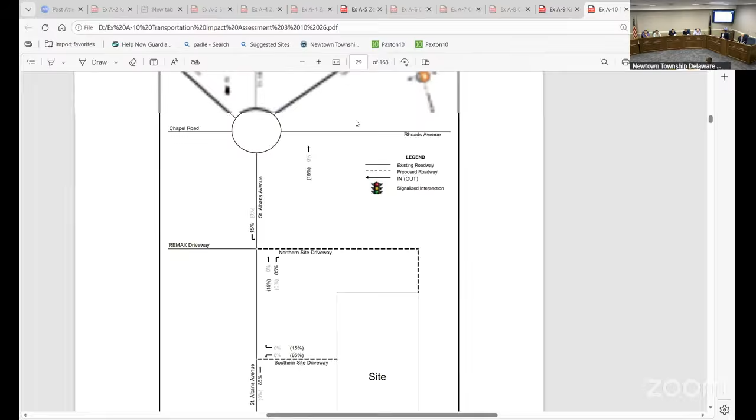Very quick question. On table 5, when you reviewed the data on table 5, the increase from the existing pharmacy to the car wash, you said that, in your opinion, it did not significantly increase traffic. I think Mr. Sikora clarified 50% was the number, the delta. Is there a number that you would consider would? What is your threshold of significant versus insignificant increases?

So PennDOT currently sets forth a trip count of 150 trips when they typically require a transportation impact study to be performed. So that's typically the threshold that we look at for substantial impact or change. So a number of trips rather than a percentage? Not a percentage, just a number of trips. Correct. Okay.

I have a question along the same line. Again, looking at that same table, it's pretty obvious that the peak increase, if you look at the peak street hours, the AM is up 68%, right? If we take our base of 57 and we add 39 to that. Saturday is not as significant. It's a 56% increase, but the PM window is only a 3% increase.

And this might fall to later when we talk ops things, but I would just ask, and maybe there's an opportunity to look at the hours of operation and try to maybe limit some of that peak impact in the morning, because that's really where it's going to be impactful to the community, as it relates to almost a 70% increase in whatever those hours are for the peak street hours in the morning. Understood. Yeah, I'm not the witness for that, but understood. Got it.

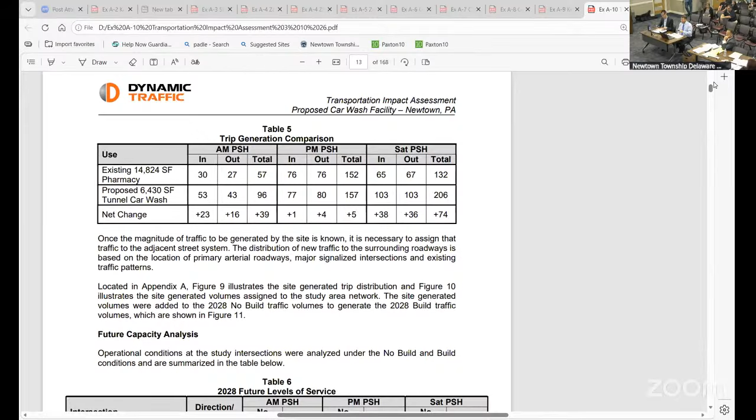Now, I'm not sure which side you're on here. He's definitely not on our side. All right, and I know you. Yeah, I should say. Step up to the podium.

So I guess it's a follow-up. It's Tom Trio, 3535 Rhoads Avenue. T-R-I-O. So I guess a follow-up to Rich's question regarding actual number counts and what Dodd's Car Wash does. I was actually privy to getting some of that information before I came in here. I'm good friends with the owner. He's a friend of mine, and he actually provided me some insight on, I would say, quite a bit more than what Kevin is letting us know here, just on total washes in 2025.

I know what you're gonna say. He can do this as part of his case, but if he wants to ask him questions about it. I mean, he asked a question to you guys, and you guys didn't have an answer, but I have those facts and actual information. Right, that would be your factual testimony. Okay. So I can't just give a broad number on cars? At the end, but if you have questions based on what he said, you will get a chance.

Kevin, another question in regard to traffic pattern: what was your logic in closing off West Chester Pike and then forcing all the traffic onto St. Albans Circle? That is a PennDOT, a state road. It's got great accessibility. You can run your traffic patterns around and navigate through your car wash a different way. I'm just curious what your logic was cutting off a state entrance and moving everything to St. Albans Circle.

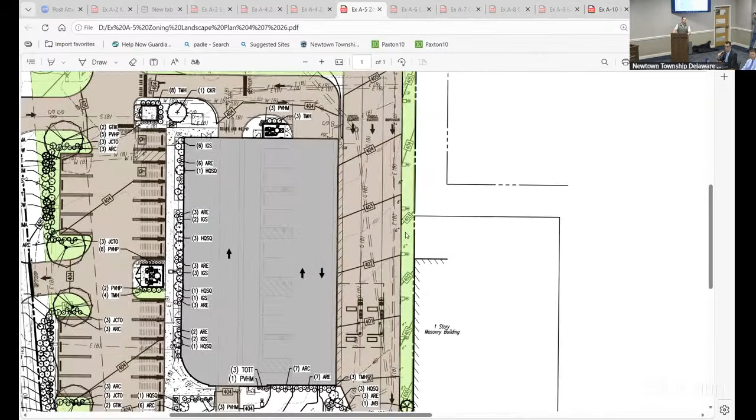So there's an existing right-in only driveway along West Chester Pike. I think it's located pretty much as far east along the site frontage as feasible. Based upon, as Ms. White mentioned, the reuse of the building, there were some limitations to where the tunnel would need to go and stacking to occur. So that driveway essentially would cut the stacking lane.

Okay. But I'm still understanding that at some point that traffic flow is going to come off West Chester Pike, right? Just stay with me here. Come around the turn, go into that lane and wrap around. There's still going to be an influx of cars lining up on West Chester Pike, probably affecting other businesses down the line when it really gets busy. Again, I'm not allowed to share the numbers, but I think your numbers are inaccurate. That's all I'm saying.

So in terms of the stacking data and the number of cars available to stack, I believe there's 25 spaces included on the exhibit. Based on data provided by El Car Wash, they found a maximum of about 10 to 12 vehicles. But all your data is analytics, it's AI, it's what you grab from what the state or a local ordinance or government creates, and then you pull that information and come to a conclusion as to what that data represents that you produce to the board.

The 10 to 12 stacking spaces was based on El Car Wash's observations of their existing sites. They looked at two existing sites in Florida to see what the maximum queues were, because they want to design. But that's sites throughout Florida. This is Newtown Square, Pennsylvania. Tom, let me just finish. Correct. So they want to design sites such that they function adequately.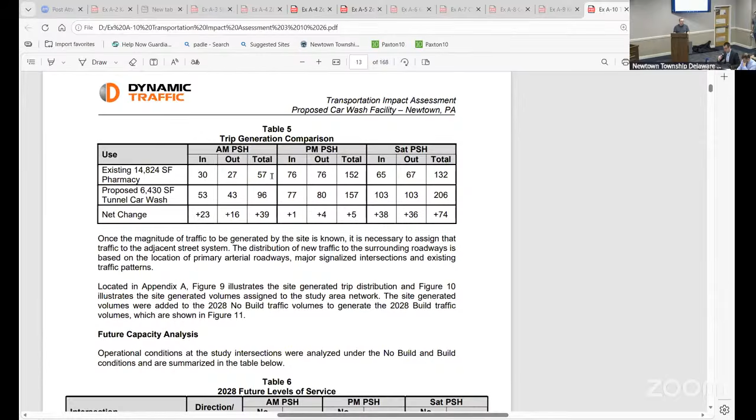So as part of our analyses, we essentially conduct capacity analyses of each intersection within the study area. So that included West Chester Pike and St. Albans Avenue, the signal, St. Albans Avenue in the northern site driveway, St. Albans Circle, and St. Albans Avenue in the southern site driveway. Based on our analysis and modeling, we essentially come up with a projection of a level of delay for each movement. Each movement essentially correlates to a level of delay in seconds.

The Highway Capacity Manual, which is a national publication, essentially correlates that level of delay to a level of service A through F. So the no build level of service A at that driveway, based on our projections, is maintained in the build conditions. Okay, but what exactly does service A mean? It's a very low amount of delay. Okay, so I guess that agrees with what I looked up, free flow, low volume and high speed. Correct. I believe that's a summary for level of service A on a highway, not an intersection. It generally is the lowest level of delay. So pretty much no impact? I would say little to no impact, minimal perceptible.

Minimal perceptible impact, okay. And last question for you: you took a site survey in February of this year? Correct. And did you happen to notice the mess at St. Albans Circle during rush hour? Yes, we performed traffic counts there and did observe queuing backing up to St. Albans Circle. Backing up into the circle and past the circle, and yeah, it's a real nightmare. So that is still a service level A? Based on our analyses, yes. I didn't observe any queuing through and beyond the circle, but we did observe queuing back up to the circle. Okay, very good. Thank you.

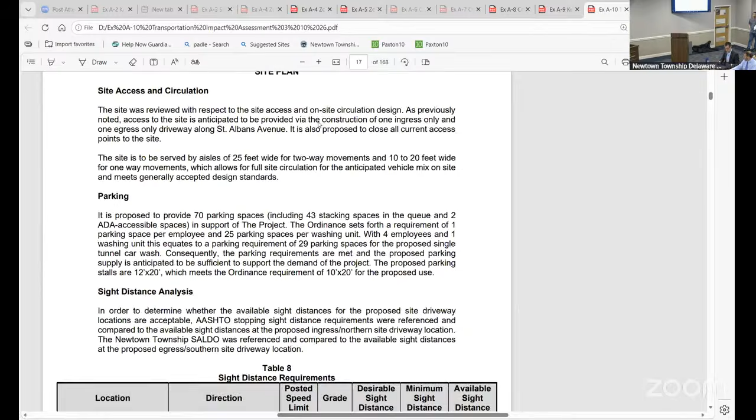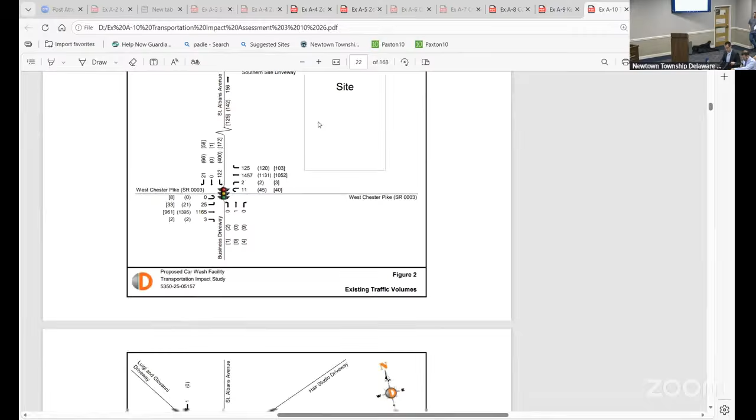Anyone have any questions for this witness? I do have some redirect, if I may. Thank you. Kevin, the table 5 that we talked about in Exhibit A10, does that need to be read and interpreted in context with your existing traffic volumes, which I think were on Figure 2, and your design build? I think that's Figure 11.

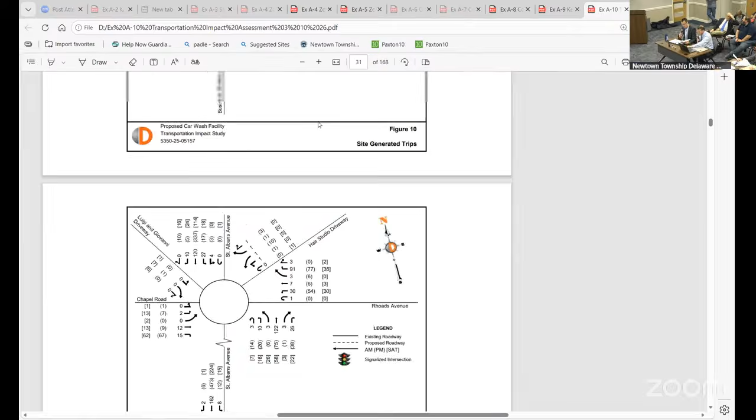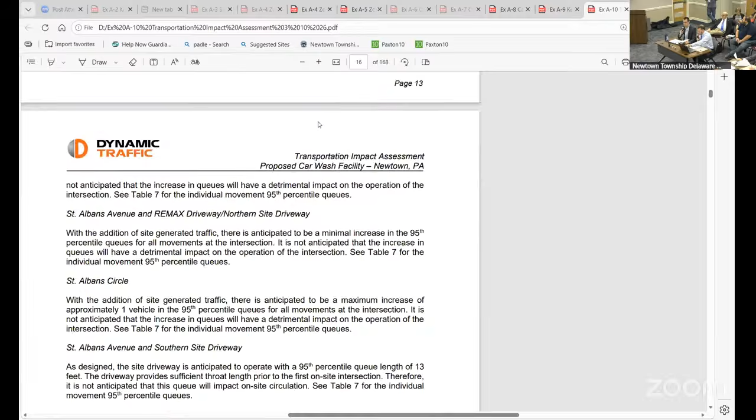No, this is simply a projection. If the property were reoccupied as a pharmacy, which, I know Rite Aid closed, theoretically another pharmacy could come in and just open the existing building. That is a projection of what the volumes could be. Okay, so if we took those volumes from a Rite Aid and we applied it and did the same analysis as you've done here for a car wash, you would be doing all the same figures, is that correct? That's correct.

Okay, so the Rite Aid would have fully occupied similar impacts to what we're talking about today, correct? In my opinion, yes. Okay, so let's look at, and I believe your testimony was the minimal impact was during the PM peak. I'm not sure whether you really testified it was minimal impact during AM and Saturday. But if we look at Table 5 again, Table 5 on page 9, in the PM peak there was a difference of a total of 5 trips. Is that correct? Correct. Okay.

And when we look at Figure 2, which is the existing traffic volumes, you have the existing traffic volumes for AM peak, PM peak, and Saturday peak, correct? Correct. Okay. And what's the AM peak generally along the site? There's about 150 to 160 vehicles along St. Albans Avenue. And what's the PM peak? About 480 southbound, 140 northbound. So 2.5 to 3 times worse? Southbound, yes. Okay, between AM. I'm taking your math for it, but yes. Okay, at least 2 times more, correct?

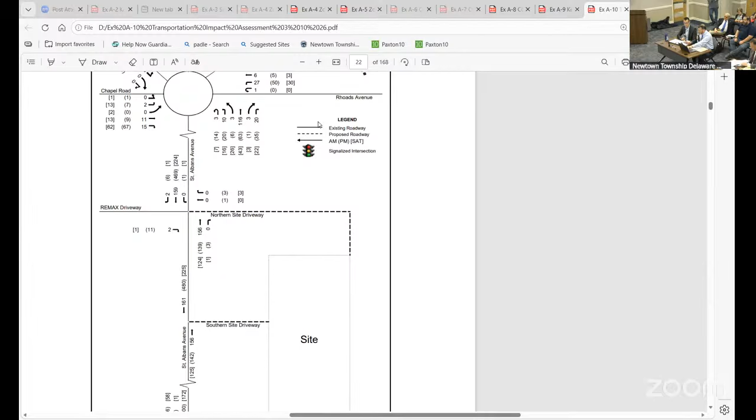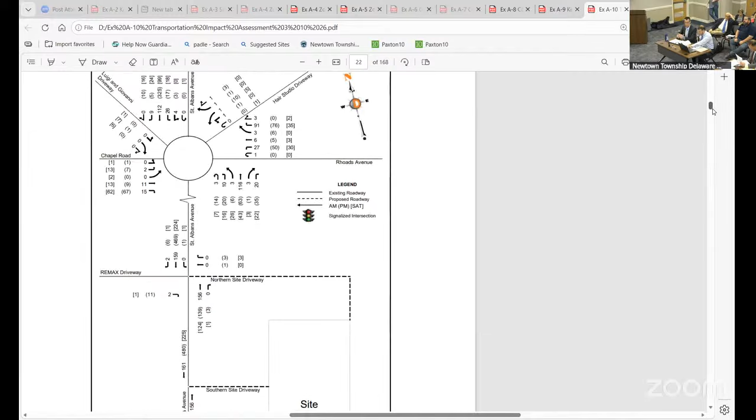Yeah. Okay, and based upon Table 5, the proposed car wash, what type of impact would it have as compared to reoccupying the pharmacy during the PM peak? In the PM peak, there would be the same, little change in level of service. So then in the AM peak, Table 5, there was an increase of 39. Is that correct? Correct. All right. And when you went back to Figure 2, that was 150 to 160. So you'd be adding 39 trips to that background traffic. Correct. And what kind of impact would that have as compared to the PM peak that's 2 times worse? In my opinion, fairly minimal. As I think you're hinting at, the weekday evening peak hour is really the critical peak hour in terms of the analysis because of the higher volumes.

And then let's do the same analysis comparing the pharmacy to the car wash and the existing traffic on the Saturday peak. The difference was 74 total? Correct. Okay. And then we go back to the existing traffic numbers on Saturday on St. Albans. And what were they on a Saturday peak? 125 northbound, 225 southbound roughly. Okay. So if we added the additional car wash traffic to the Saturday peak hours, is it anywhere near the PM peak? No, it'd be less.

There were a lot of questions, both from the board and from Mr. Sikori, about why didn't you use El Car Wash or car wash data? Does PennDOT regularly accept specific use data when they're calculating traffic impacts? Yes, for, I would say, 98% of the traffic studies and traffic impact assessments that I've submitted to PennDOT, we have utilized ITE data. ITE, but do they use specific data? Like if I said to PennDOT, I'm going to put an El Car Wash in, I want to use my El Car Wash traffic, will PennDOT accept it in the traffic impact study? They would, yeah.

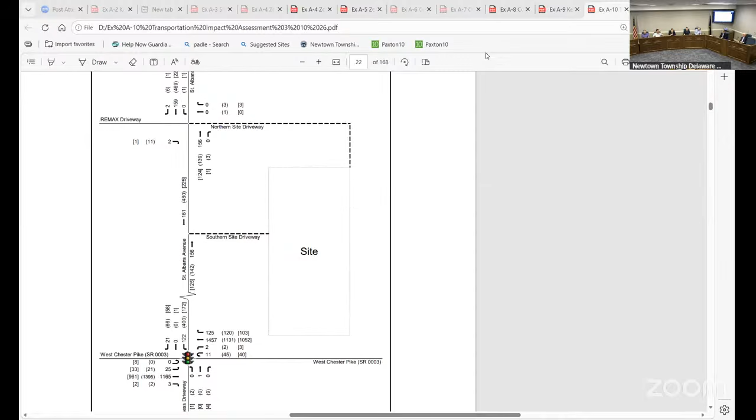If we're gonna open up for public comment, can everybody please just again be respectful here? There will be another opportunity then as well for public comment. But if anybody's here now and wishes to make public comment, just give your name and address for the record. I'll go. Elliot Shalita, E-L-L-I-O-T, S-H-A-L-I-T-A. My address is 3550 Woodcrest Avenue, Newtown Square.

As a member of the neighborhood that's going to be impacted by this, and as I mentioned earlier, I'm a committee person for the precinct. I have spoken to a number of people in the neighborhood, and I've been here the whole time. I've listened to three whatever hours of testimony. And I heard both Ms. Weiss and Mr. Savage mention that the character of the neighborhood wouldn't be affected.

And so if I'm not permitted to ask questions directly, I'm going to speak to the board directly and say that's one of the things I think, if I'm not wrong, we're supposed to be watching out for. And I question whether or not the character of a neighborhood is defined as easily as traffic volume, courtesy gaps, or delay time. I'd like to know, and I would have asked the question, if we live in a residence and a neighborhood, is that how we define the character of our own neighborhoods, by traffic volume?

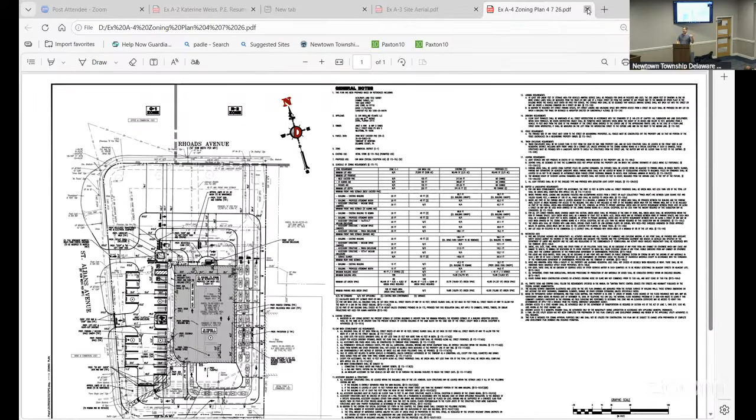I'd like to ask, did anybody consider the pass-through versus the local traffic? I know it was mentioned. The reality is it's going to be pass-through. A Rite Aid is local. People come pick up their prescriptions at their closest possible pharmacy. A car wash is pass-through. I'd like to ask the question, does anybody know how long a typical sedan or SUV is? How many cars are going to be able to fit before the southern egress starts to be blocked? Anybody who knows human nature knows that as soon as the left turn is blocked, people are going to go to the right. That's what's going to happen.

Around St. Albans Avenue, I'd like to ask the question, since the neighborhood truly was not considered by this group, as far as I can tell, at least so far, did anybody consider the bus stops that are at the corner of... I didn't hear Woodcrest Avenue mentioned a single time. There are kids crossing the street eight times a day. And there's going to be people not from the neighborhood who are driving down St. Albans. I've spoken to the people in the apartments on St. Albans. They tell me people go 40 miles an hour down St. Albans Avenue. And I've personally witnessed twice people blow the bus stop sign. We're going to have people going down roads and through Brookside to get out on Bryn Mawr.

Mr. Savage implied that 15% are going to head into the circle, the other 85%... I'd like to ask him the question. I heard him say the numbers. It wasn't clear how he came up with them. And then when you look at his table, it's figure, sorry, one second, it's figure 9, which is the percentages. When the 85% come southbound to West Chester Pike, he has slightly over half of them turning eastbound onto West Chester Pike. Now, I have no idea why half would be going that way.

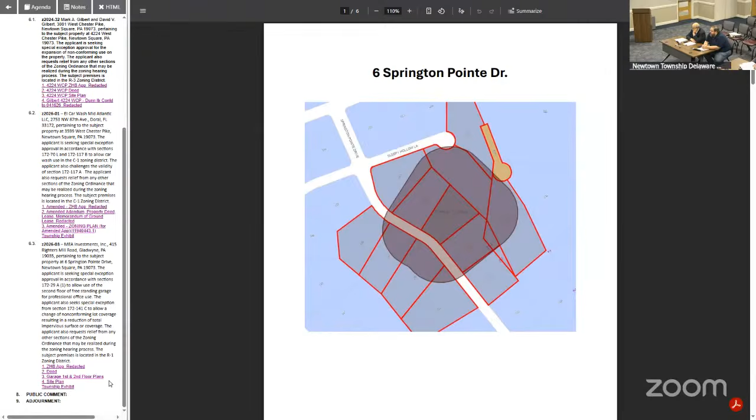Can we put the evidence into the record? Oh, I'm so sorry, I just jumped right into it. So is the file in order? Sorry, they threw me off because of their side conversation over there. We have in the file the legal notice that was sent to the surrounding properties, the legal notice that was in the paper, and the list of all the addresses it was sent to. So yes, the file's in order.

Chairman, based on the representation of the township manager with regard to this matter, I would ask that the application and accompanying documents, the exhibits presented by the applicant, be marked as township exhibit number 1. The list of residents within 200 feet of the subject property who were notified of this hearing be marked as township exhibit number 2.

Proofs of publication of 2 consecutive weeks of publication in the Delaware County Daily Times be marked as exhibit number 3, and the photograph of the posting of the notice on the property marked as township exhibit. They are admitted. All right, is there anyone here for public comment or party protestant? All right, all yours. Thank you.

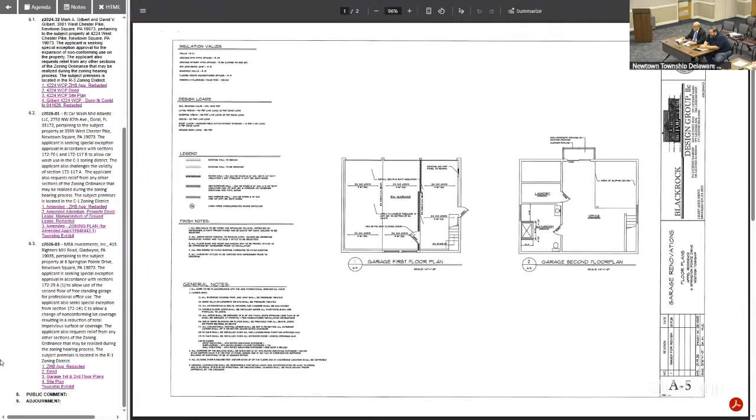If it may please the board, I won't repeat my name and the client again, but the original application involved 2 requests for special exceptions. One involved the utilization of the 2nd floor of the existing garage to be renovated and used for a professional office building. Had my legal arguments all cleverly put together and ready to go, but the client has withdrawn that application. So I'm officially withdrawing the application on behalf of the client on the record.

And the only remaining special exception is for the modification of the impervious ground coverage from the existing impervious ground coverage to a lesser ground coverage. And the only reason that we're here for that, we're actually reducing impervious coverage, is because Mr. Rexick indicated, and correctly so, your ordinance requires a special exception even when you change a non-conforming use to a more restrictive situation. In this particular instance, I have one witness, and that's Mike here tonight. He is a registered architect, and he's the project manager for the site.

Mr. Appel, the applicant, has bought 6 Springton Pointe, which is a residential property in the R1 district. It's got a substantial home on there, including a freestanding garage, which again is not the issue tonight. And basically, the internal work to renovate the dwelling has gone on, and the board can see the extent and the scope of that work by taking a look at exhibits 3A through 3J. These are all photographs of ongoing work at the dwelling and in the dwelling, which again is proceeding under permit, and it's going to cost hundreds of thousands of dollars. The house is a substantial house. It's about 3,900 square feet footprint. So that's close to 7,800 total square feet, first and second floor.

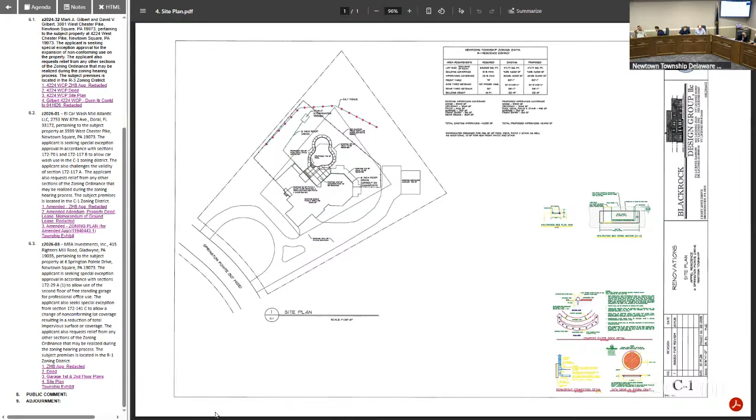That's my after 10 PM style. Mike strikes again. He put me up to it. Speech, yeah. Oh, it's here. You're already exaggerating it. He's sleeping. You're gonna need all this stuff again on the other. I don't know, that's what I was just thinking. I don't think you're gonna get another packet out of the guy. Yeah. Do it on paper.